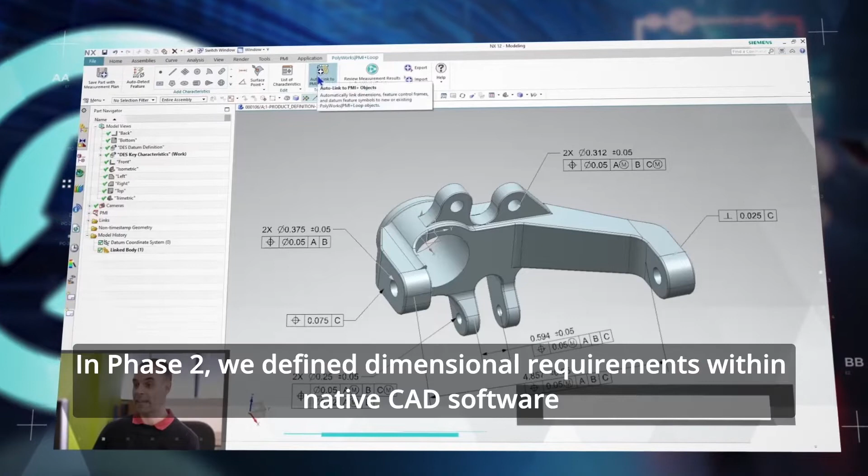We demonstrated digital 3D measurement processes that optimized the fabrication of a steering knuckle. In Phase 1, we measured the part and used PolyWorks DataLoop to give direct access to the resulting 3D measurement data to everybody in need of manufacturing feedback. In Phase 2, we defined dimensional requirements within native CAD software by using the PolyWorks|PMI+Loop model-based definition solution and shared this MBD with downstream applications.

We also showed how to import the latest CAD model revision stored in a product lifecycle management system directly into PolyWorks. Finally, we put all the components of the PolyWorks ecosystem to use and demonstrated an optimized digital process for managing part design changes.

Last year, we demonstrated that the digital 3D measurement processes were within reach for all our customers. This year, we'll roll up our sleeves and show you how it is done. We want to show you how a digital transformation project based on PolyWorks goes on in the field, practically one step at a time. We'll talk about the installation, configuration, and the customization of our digital enterprise infrastructure to allow customers to maximize their benefits.

We will show the benefits of the PolyWorks digital ecosystem existing through modules that can be deployed gradually, at whatever pace you feel more comfortable with. This approach is important as by splitting a large project into smaller ones, enterprises have more control over their implementation calendar and can avoid disrupting their own operations.

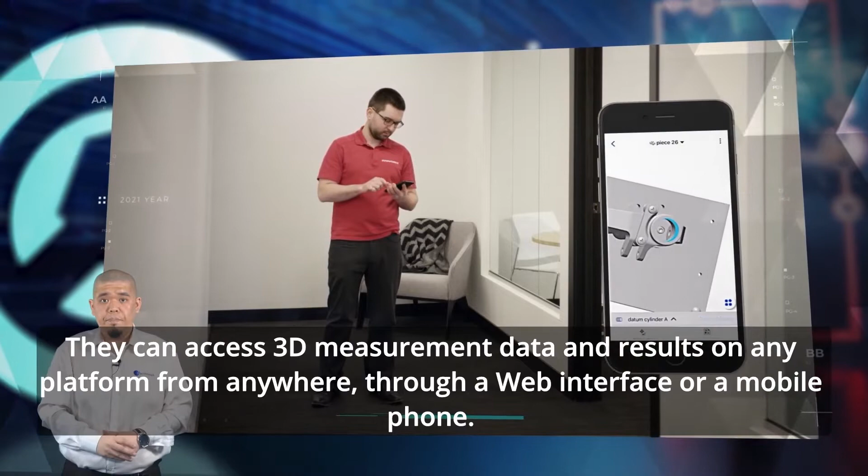For colleagues that need to consume 3D measurement data and have no PolyWorks expertise, it's like jumping into a whole new universe. They can access 3D measurement data and results from any platform, from anywhere, through a web interface or a mobile phone. They can exchange inspection projects by sending hyperlinks by email or chat, and it's even possible to launch technical discussions and tag colleagues within projects, for example, to investigate an actual manufacturing issue.

In our next step, we're going to define and implement a metadata management strategy. To understand the concept of metadata, just think about digital music. A digital audio file that plays a song does not come alone. It also contains the song title, the name of the author, the song's duration, a reference to the album, for example, and so on. This extra information that accompanies data is called metadata, and without metadata, it would be a nightmare to consume digital music, right?

In a 3D metrology context, metadata consists of important attributes describing the part design, piece fabrication, and 3D measurement processes. Ensuring meaningful and usable metadata is critical to maximizing the benefits produced by a data management system. For further details on metadata management strategies, here's Jean-Sébastien Blais.

Metadata designates the set of attributes or information that can be attached to 3D measurement data and follows it. In metrology, it makes sense to have metadata that describes the design, the manufacturing, and the measurement story for each inspected piece. Such important information can be entered as project and piece properties in PolyWorks Inspector. Project properties derived from the design context include the part name, its number, the material it's made of, and are generally entered just once.

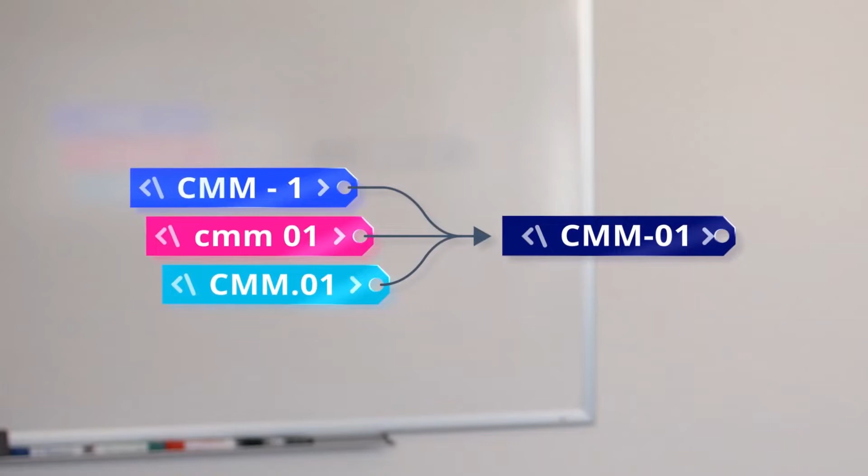With your metadata identified, the committee should also establish the list of possible values for each metadata. This will ensure everyone uses the same expression to fill in the properties. Together, the list and the possible values are what we call the metadata management strategy. Fortunately, PolyWorks includes all the tools you need to efficiently enforce the exact metadata management strategy your committee agrees upon.

First, to ensure uniformity, you can preset possible values both for standard properties and the custom properties you will create. Users will appreciate the convenience of selecting values from a list rather than typing required information. Second, you can decide which properties will be visible upon creating a new piece and make them required values. This helps the PolyWorks user focus solely on relevant properties and ensure the metadata is collected.

After giving this a try, you will rapidly realize the same properties are often being reused across your different inspection projects. Therefore, you will be pleased to discover that you can upload and link the properties you always use to DataLoop. This makes it extremely easy and efficient to reuse them. Clearly, PolyWorks contains all the required tools to help you enforce a robust metadata management strategy.

But remember, this all starts by identifying the key information to tie into your 3D metrology data. This is why we recommend implementing your strategy as early as possible within the PolyWorks DataLoop adoption process. You will soon discover that metadata plays a critical role in the resolution of manufacturing issues.

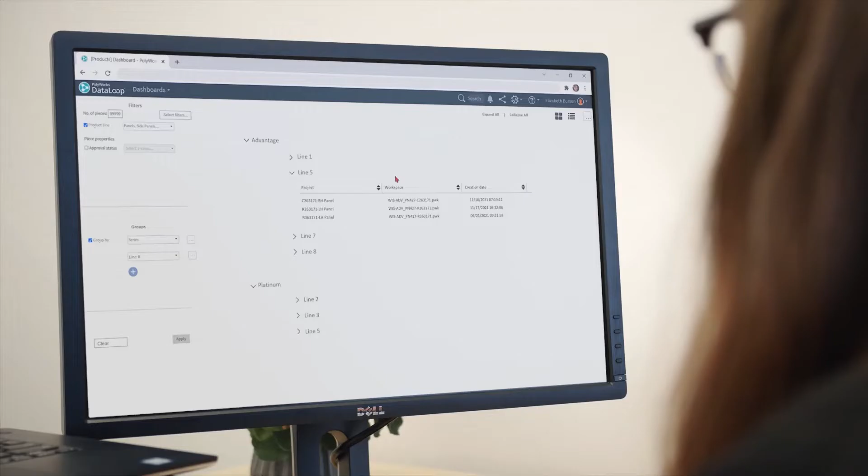Build individualized dashboards with widgets that monitor the inspections performed there. Here, it's helpful to configure SPC monitoring rules and alerts that will notify the operator when measurements begin to drift. Likewise, create a dashboard to cycle through incoming inspection results on a big screen TV, providing a real-time reference for all team members on the manufacturing floor.

Measurement trends that violate the SPC rules will display clearly in red, making it easy for operators to spot the issues that require immediate investigation. Finally, define notifications and alerts to automatically track critical inspection criteria in the DataLoop database. This greatly reduces all the repetitive manual monitoring you and your colleagues have been doing.

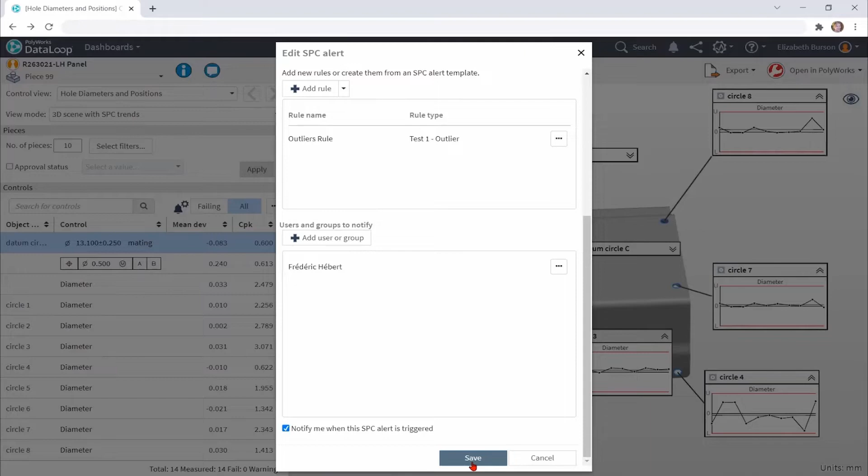For example, monitor the SPC performance of inspected critical hole positions, specify a list of recipients from the DataLoop users, and when the positions start trending out of tolerance, they'll be automatically notified. Or observe the percentage of controls within specification tolerance, or supplier inspection upload frequency, and deliver a notification when alert criteria are met.

The PolyWorks deployment is now complete. Dashboards and alerts detect and highlight manufacturing problems and immediately notify those who should be informed. And here's where our built-in digital communication tools ensure that this measurement information is immediately actionable. DataLoop empowers the interconnection of users, manufacturing data, and problem solving by integrating modern communication tools within the interface.

If you've been notified about a manufacturing problem via email, no problem. You'll also receive a hyperlink that directs you to the rich 3D measurement data context, so you can review the actual measurement data and make faster decisions. What if the problem is more complex and requires a task force to resolve it? Simply comment in the discussion thread directly within the inspection project, keeping the discussion linked to the data it addresses. Collaborate with colleagues by tagging them, and they receive a hyperlink to access the project data in real time.

With streamlined access to 3D measurement data of manufactured pieces, automated monitoring, and by deeply integrating digital communication tools that accelerate the resolution of manufacturing problems, PolyWorks has created a new category of quality control solutions. PolyWorks brings 3D measurement data to the heart of your manufacturing processes.

Currently, there are several products in the market that can manage dimensional controls of production pieces and trigger alerts on detecting a dimensional failure. What sets PolyWorks apart is that it also manages the inspection project data and offers modern communication tools. So when a failing piece is detected, users are a single click away from reviewing a piece's dimensional data in PolyWorks, and a single click away from inviting colleagues from other departments to join in the investigation efforts.

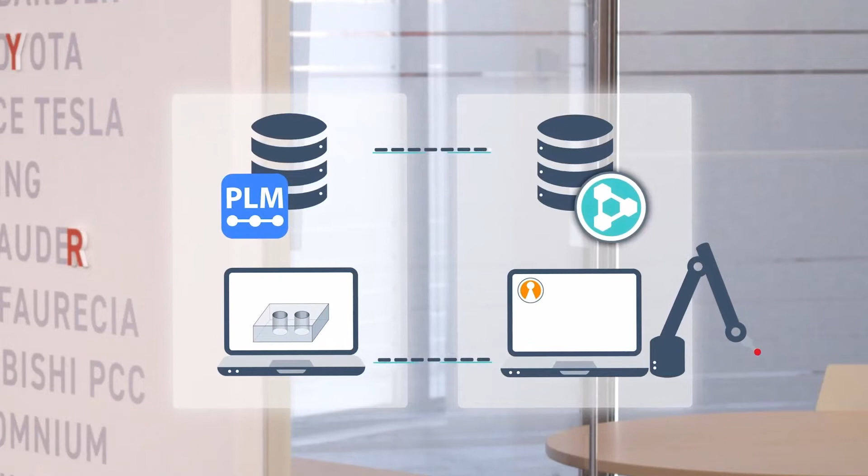With your product lifecycle management system, also known as PLM systems. PLM systems are solutions that manage the entire lifecycle of a product by integrating data, processes, systems, and people, and providing a product information infrastructure. With a PolyWorks DataLoop PLM connector installed, you can ensure digital data exchanges between your PLM system and PolyWorks.

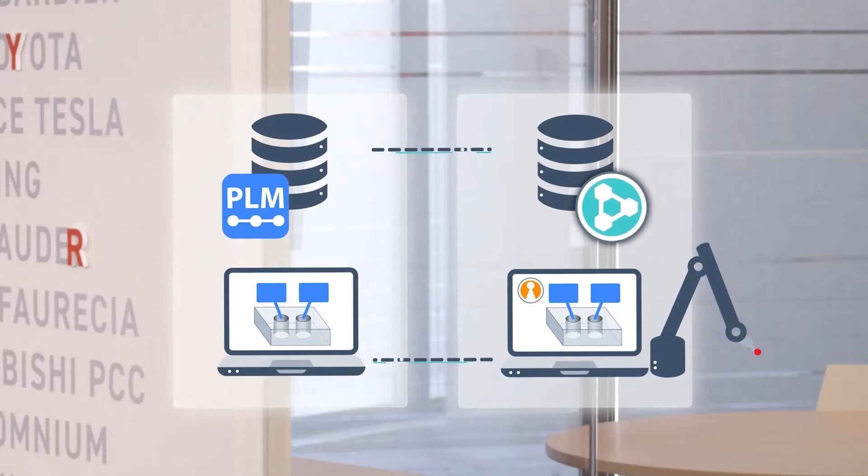PolyWorks users will search for CAD models within the PLM system and import them directly, and PLM users will directly access 3D measurement data and results in a single click, as our PLM connectors inject hyperlinks into the PLM items of the single parts and assemblies. A pretty good beginning, isn't it?

With the deployment of PLM connectors, you can say goodbye to manually exporting and sharing data on network drives and browsing for files. You ensure that CAD data and 3D measurement data move effortlessly between all the teams.

What's coming next? We recommend augmenting your corporate CAD software with the metrology-driven model-based definition solution, or MBD, to allow the creation of complete parametric 3D control plans within the CAD environment and increase the level of process automation.

By enriching your CAD platform with MBD capabilities, you'll ensure digital traceability by associating measurable and traceable 3D measurement objects to CAD geometry and assigning unique IDs to each dimensional requirement. Digital traceability enables 3D metrology software to digest the MBD and its revision automatically.

You'll also validate the measurability of dimensional requirements before embedding them in the 3D control plan, allowing 3D measurement operators to start measuring directly after importing the MBD.

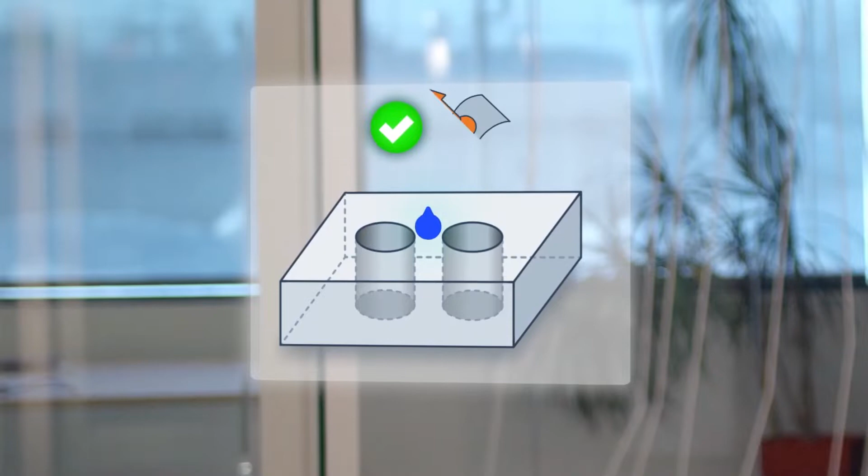Finally, you'll create all dimensional requirements within your CAD platform, including the ones that were traditionally created within 3D metrology software. At last, users of CAD and 3D metrology software can share the same 3D control plan. Sounds exciting, but how do we get there?

Firstly, users of your corporate CAD software need to learn the native PMI tools offered by the CAD platform using training material from your CAD software provider. With this new skill set, your CAD team will be able to define dimensions and GD&T attached to the CAD geometry and create multiple views to regroup this PMI in a logical manner suitable for reviewing and reporting purposes.

Then, it's time to deploy the PolyWorks|PMI+Loop MBD solution. PMI Plus Loop installs an add-in that injects a toolbar in your CAD software to provide access to MBD functionalities for 3D metrology that complements the native CAD PMI tools.

To ensure a smooth adoption of PMI Plus Loop, we recommend the deployment in 2 steps. Your CAD user should first leverage the native CAD capabilities by creating native PMI using standard CAD tools, adding this PMI to the 3D control plan and creating measurable and traceable objects automatically, and assigning unique numbers to dimensional requirements for reporting and troubleshooting purposes.

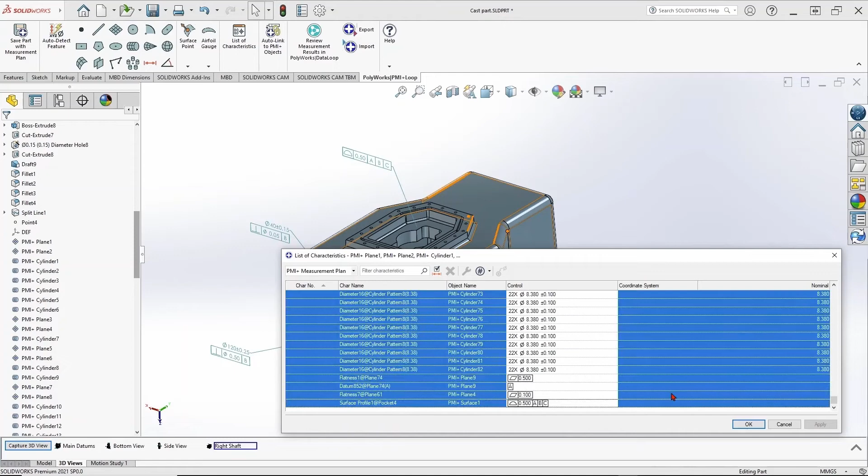Then, they can start creating more complete control plans. For example, by creating new object types, such as surface points, activating new dimensional controls that complement native PMI, such as airfoil dimensions, and using CAD coordinate systems to control the context of certain characteristics.

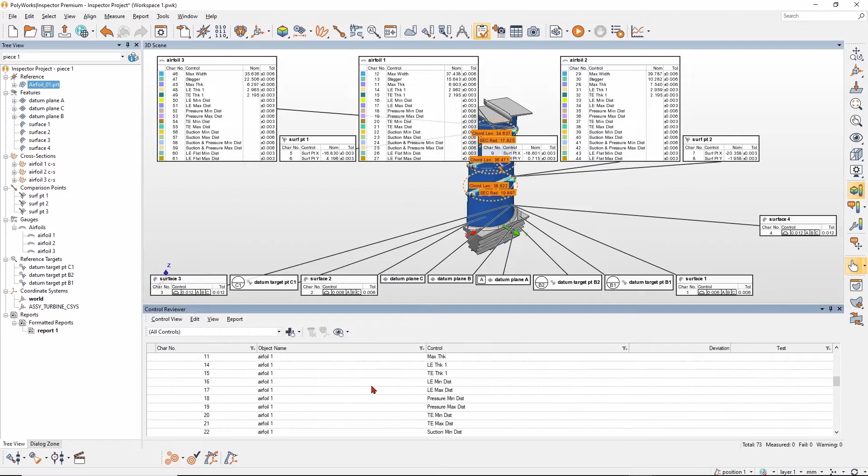We've talked a lot about a CAD team, but what about the 3D measurement team? Well, as PolyWorks Inspector automatically creates its 3D control plan upon importing the MBD data created by the CAD team, they have nothing to learn and can get to work sooner.

We've just seen how the PolyWorks digital technologies bring together the design, manufacturing, and 3D measurement teams. In this new world, 3D measurement data is consumed instantaneously by anyone who needs it. Modern digital technologies eliminate silos and facilitate collaboration between all the teams. And dimensional requirements are created only once within the CAD authoring tool and reused for all activities in the product lifecycle.

As you can see, the benefits of unifying the 3D measurement and product definition ecosystems are overwhelming, and I have two further points to add here. Firstly, the universal access to 3D measurement data is the key to fueling the creativity of the engineering and manufacturing teams. 3D measurement data is already used to optimize manufacturing processes, perform virtual assemblies, simulate a piece's behavior under various conditions, and improve the manufacturability of future designs. It's up to each organization to exploit this goldmine of information to its fullest.

Secondly, the injection of hyperlinks within the PLM systems holds the secret promise of digital traceability. It becomes possible to digitize PLM-based enterprise processes such as design changes and part approvals, while referring to the complete 3D dimensional data that could be reanalyzed at a later point. PolyWorks integrates the digital twins of measured pieces within the PLM.

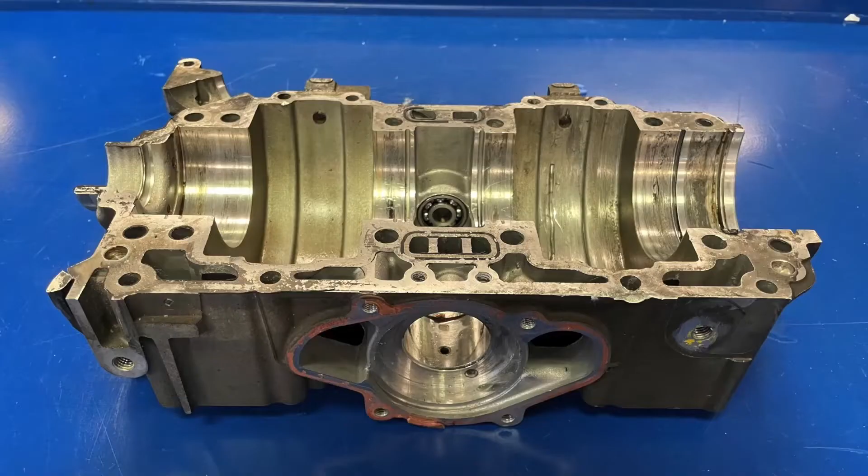The heart of the solution is a mechanism that carries the geometry of the manually fitted or probed features to the next piece. If we know where a feature is relative to alignment geometry on the first piece, we can look for that feature in the same relative location on future pieces. This function is performed by a new tool called a measurement guide. It is a sort of invisible feature primitive that sits behind manually measured features and retains the geometry of the initial measurement, whether probed or extracted, and brings that information to subsequent piece inspections.

Let's look at this new workflow as it follows the familiar hybrid inspection on this motorcycle part. We have a set of them that have each worn a little differently, and engineering would like to compare them.

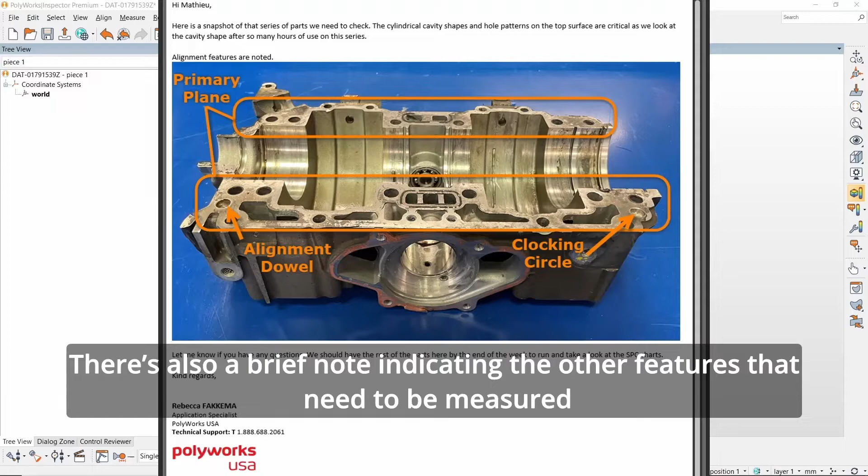This memo lets us know what geometry we should use for the alignment. In this case, we want to use this plane and the two dowel pin holes for a plane center point axis alignment. There's also a brief note indicating the other features that need to be measured, both in the part cavity and the bolt patterns. Normally, we would start by measuring our alignment features, so let's do that here.

Just like if we had a CAD model, we can use an alignment to bring our data to a coordinate system. This is essentially what we do with an alignment to CAD. If we were aligning to CAD, we would move the data using surfaces and features to corresponding nominal surfaces and features. In this case, we're bringing the features we would measure directly to the coordinate system. No CAD, no problem.

The destination on the tertiary features asks us for a point. We don't know what the coordinates are where the circle is supposed to be, but we can choose which direction we want to clock it to by entering a positive number next to the axis it will lock to. Now the part is aligned and clocked correctly to the x-axis. We'll continue to measure the rest of it.

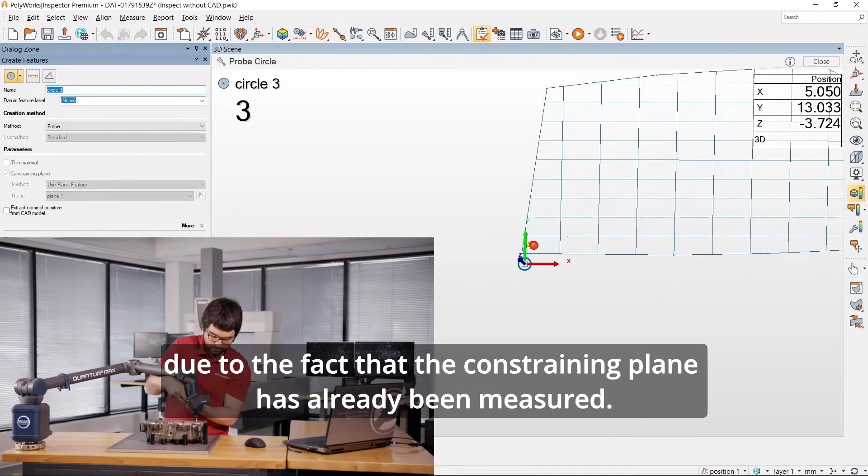The hole pattern will be measured with the hard probe easily, due to the fact that the constraining plane has already been measured. The fastest way to thoroughly capture all the features in the cavity would be to scan it. This is one advantage of having a hybrid hardware solution. Surface-based features, like the planes and the cylinders in the part cavity, can be quickly fit using the Extract from Polygonal Model tool.

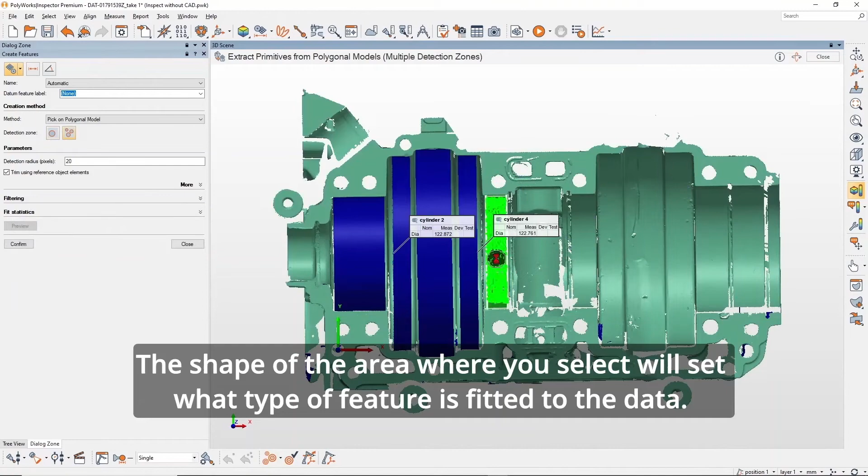You might notice that this tool moved in PolyWorks 2022. It is now with your other Extract Multiple Type tools in the Create Features menu. As usual, PolyWorks will initialize the curvature of the scan the first time you start picking features, after which picking will be near instantaneous. The shape of the selected area will dictate what type of feature is fitted to the data. Flat areas create planes, while curved areas create cylinders, cones, and spheres, all with Pick on Polygonal Model as the creation method in the feature properties.

We can add nominal information to features and tolerance them in geometry controls. For groups of features, like the hole pattern that was probed earlier, or the cylinders which have different diameters but the same tolerance, select the relevant features and set all their nominals or tolerances in the geometry controls at the same time.

In addition to features, other controls like cross sections and calipers can be added to the project to control the local width of the cavities. All sorts of calipers can be used on scan geometry, with or without CAD. As usual, the final step is to build the report, which has been completed. With the part inspected, we're ready to measure a new piece.

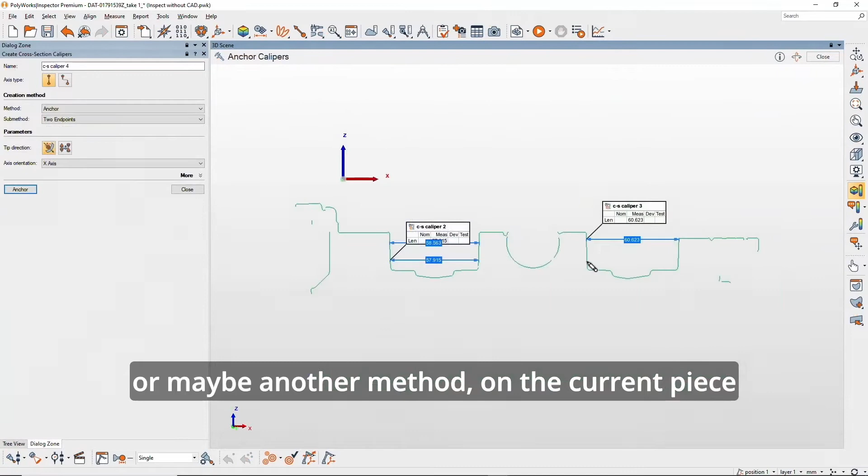Before we start inspecting it, remember that we manually created features, either by probing, extracting from polygonal model, or maybe another method on the current piece. Usually, if we were doing a multi-piece inspection with CAD, we would extract any features fit from the mesh. We want PolyWorks to do that the next time, so let's extract them now. Right-clicking and extracting measured changes the measurement method in the feature properties.

When we change the measurement method to extract, our measurement guide takes over and becomes the extraction source for the feature. It is normally invisible, but we can expose it by right-clicking on the feature and selecting View, Measurement Guides, Restore. Let's see how these measurement guides provide probing and feature scanning guidance and automate extraction in the next piece as we measure it.

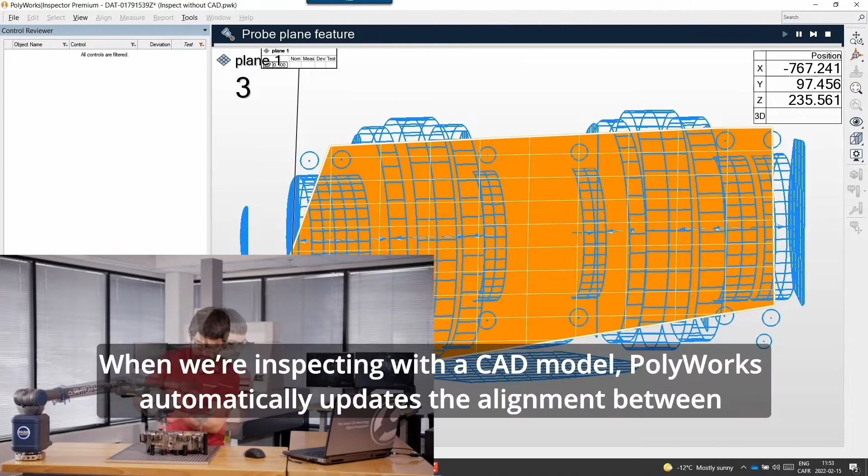Now that we've launched our new piece, the measurement guides are visible for all features, giving the operator an overview of the part's shape so that they can start measuring the correct features confidently, even without CAD surfaces. When we're measuring with the CAD model, PolyWorks automatically updates the alignment between the device and the part as soon as the alignment features are measured. The same happens here, and guidance walks our operator Mathieu through probing the rest of the circles.

After probing, PolyWorks prompts the user to begin scanning. Feature scanning guidance highlights features that have not yet been scanned in orange, and ensures that the operator captures enough data in the measurement guide locations for reliable feature extraction.

When scanning is completed, the features extract based on their measurement guides, like we saw earlier in the feature properties, and the project will update as normal in PolyWorks. Let's double check our updated report. The operator can continue inspecting as many pieces as needed using the same process.

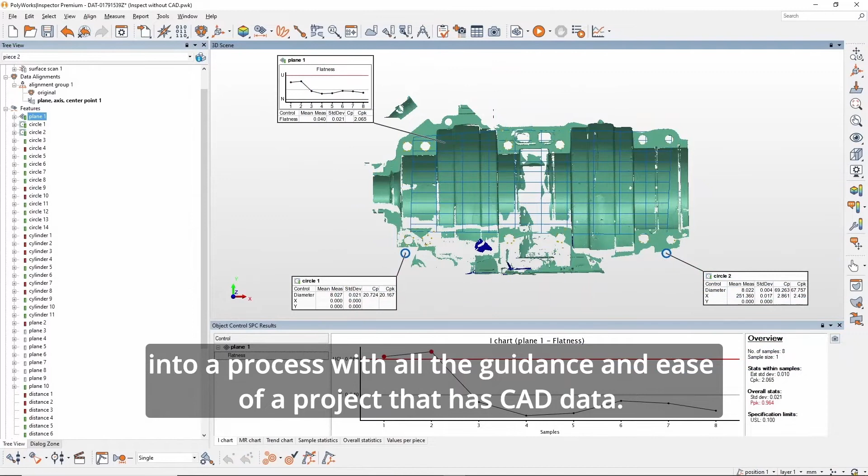As you can see, the measurement guides turn our CAD-less multi-piece inspection into a process with all the guidance and ease of a project that does have CAD. So here we saw how easy it is to create an inspection template without a CAD model on PolyWorks Inspector. By using this piece template, we have the benefit of having guidance when scanning and probing on subsequent pieces. The measurement guide also allows us to use our powerful extraction methods to obtain results in an automated and repeatable fashion.

With this template, we have the benefit of having guidance when measuring subsequent pieces, both for scanning and probing. And the powerful extraction methods on PolyWorks allow us to obtain results in an automated and repeatable fashion. This workflow proved incredibly useful in an array of situations, such as the CAD model not being available, the CAD model arriving late, or the CAD just simply does not match the part or the drawing, such as missing features or geometric discrepancies.

These situations can also cause a series of issues, such as misleading information after the inspection is completed, time wasted looking for the correct version, and the impossibility of trying to measure features that simply aren't on the CAD model and don't match up.

This is why in the next video we will see how to tackle those situations by incorporating the correct CAD model when it eventually shows up, so that you can use your extraction CAD-based tools such as color maps, surface features, and many, many more. You'll also see how you can use the new measurement guides to complement the CAD-based inspections when needed by measuring features that might be missing.

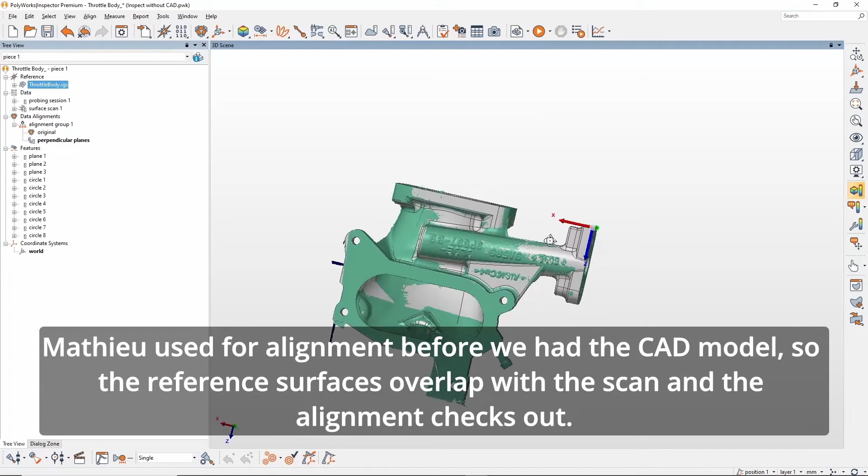The CAD model can be dragged and dropped directly into the project. Its coordinate system matches the coordinate system on the drawing that was used for the alignment before we had the CAD model, so the reference surfaces overlap the scan and the alignment checks out.

When the CAD model imports in the correct location, nominal feature components can be extracted directly from the CAD object. Right-click on the feature and extract its nominal automatically using the second item in the right-click menu. PolyWorks will find the CAD geometry that matches the measured features and define it as the nominal component for the feature. Of course, extracting the nominal primitives from the CAD fills in the missing nominal information in the geometry controls, as is the case for these circles.

Tools like surface profiles and reference object color maps are only available when you have nominal surfaces. We can add a surface color map to this project and adjust its limits by hovering the cursor over the scale bar and scrolling the mouse wheel until the full range of the scale matches the area we're interested in.

Last step is to create a template and use it to update all the other pieces in the project. Since we added the CAD and color map in the first piece of the project, let's create a piece template from this piece and link it to all the other pieces in the project.

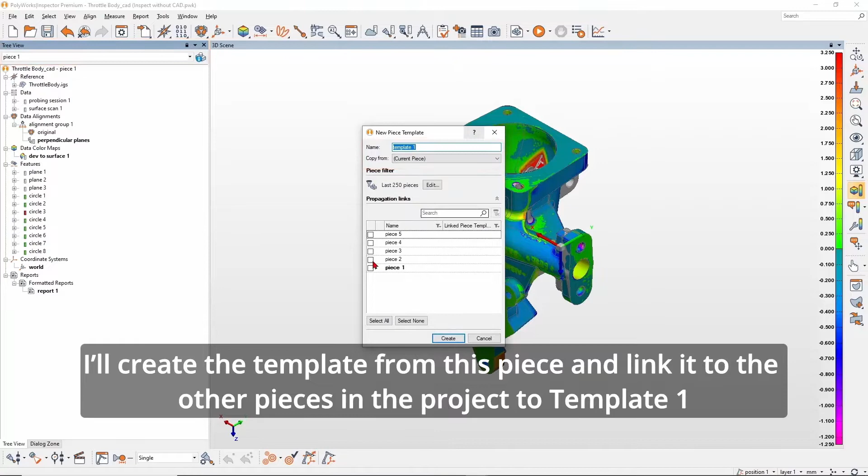Propagation ensures that our previously inspected pieces use the CAD model along with the new nominal information, as well as features and controls, or even color maps and reports we have added. The SPC charts now show nominal position information for the controls of these circles.

There is another scenario in which pairing the new measurement guide tool with propagation can be very useful. In the event that there is a feature on the part that is not on the CAD, how can we include it in our multi-piece inspections? This throttle body has an insert where there is a hole on the CAD model. Let's use a measurement guide to include this feature in our multi-piece inspection.

The cylinder is fit to the scan using the Pick on Polygonal Model tool. This takes us back to when we didn't have CAD. I'll extract the feature to tell PolyWorks how I want the feature to be measured on the future pieces, and the measurement guides become the extraction source for the cylinder.

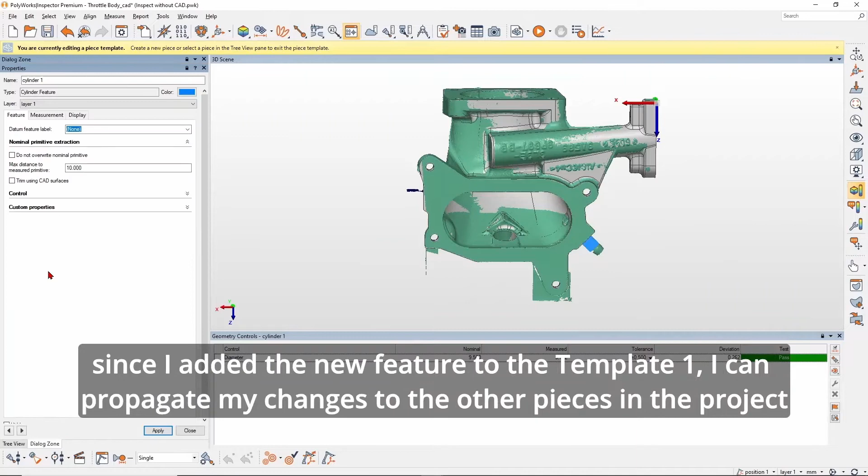Of course, since I added the new feature to the template, I can propagate my changes to the other pieces in the project. The measurement guides will be propagated to the other pieces, so once again our SPC charts indicate that the feature has been painlessly added to every piece in the project. Our hybrid project has the agility to adapt when CAD data becomes available, and the flexibility to fully integrate all of the measurements you need.

So, in summary, if a user started inspecting without a CAD model, all the work that they did can be reused and even enhanced if the CAD model eventually becomes available. We can now add the reference model in post-inspection for some more advanced measurement tools and use the measurement guide technology to measure features that were missing on the CAD model.

Finally, we can use the power of propagation to apply these changes to all previously measured parts for the coherent set of results for SPC with minimal effort.

So thank you everyone for watching the first workshop of the day. I'm pleased to have shown you that inspection without CAD now follows the PolyWorks universal workflow in subsequent pieces. And now, setting up multi-piece inspections are more powerful and easier than ever, thanks to this new measurement guide technology.

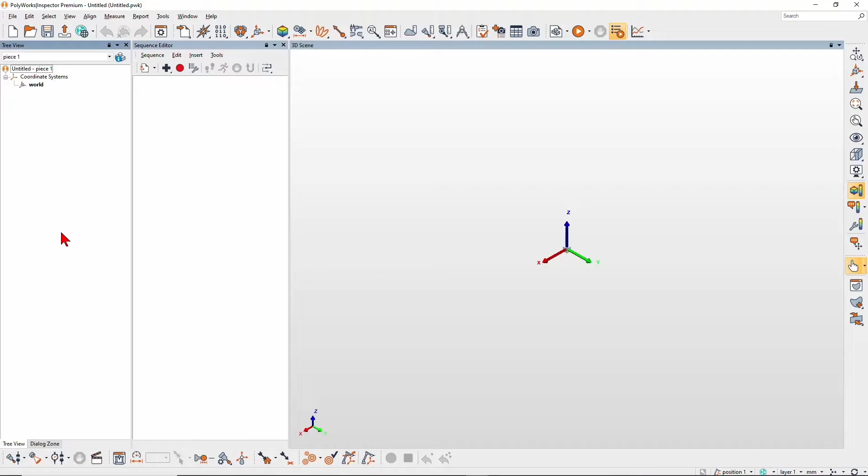In this example, we have a CMM programmer and a CMM operator collaborating on the inspection of a machined pump housing. This template was created and uploaded by the programmer and is being downloaded by the operator. Thanks to DataLoop, it is easy to transfer a project from the programmer's office to the metrology lab. This project contains a 5-axis sequence to be used with our Renishaw PH20 head.

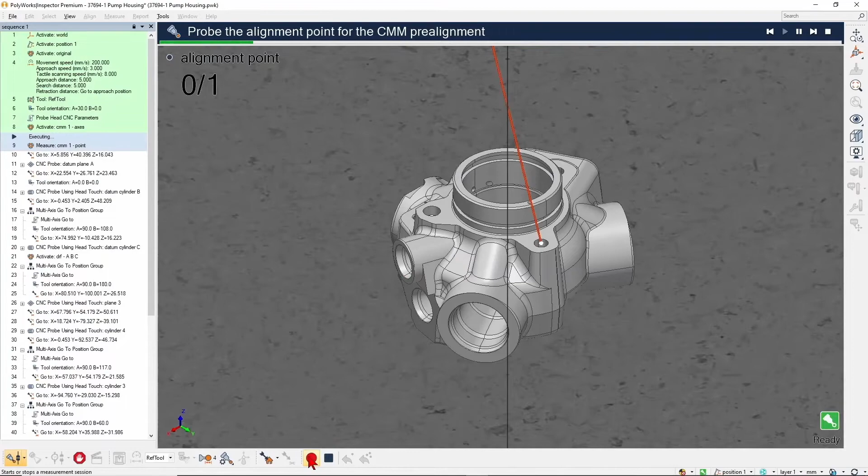The operator is about to measure a new piece, and we are going to take a closer look at the measurement process in action. I will be highlighting the new functionalities that will be explained in more detail as this workshop progresses. This sequence step defines the speed and acceleration values for the A and B axes of the PH20. As we see now, the first steps in any CNC CMM sequence are to probe the alignment features, in this case, our datums.

Here we see the first use of a 5-axis movement within PolyWorks Inspector. This cylinder is being measured efficiently using 5-axis movements to minimize the time between measured points. Here we can see a tool change and a go-to position occurring simultaneously within a multi-axis go-to position group. This is yet another new 5-axis functionality offered within PolyWorks Inspector this year.

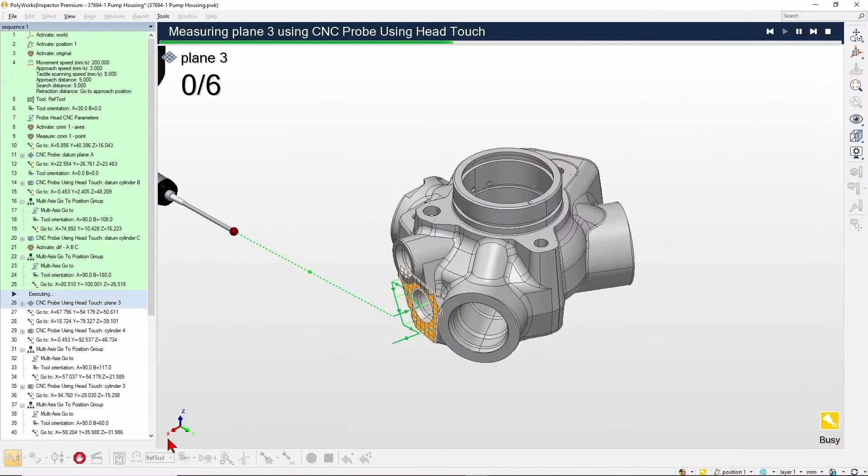Here we can see the optimal measurement of a plane, utilizing all 5 axes of the PH20 in the process. This part of the sequence is interesting. We see how well the sequence is utilizing the combination of 5-axis go-to positions and head touches to measure all those cylinders around the part. As you can see, as soon as the head is done measuring the cylinder, the 5-axis go-to position kicks in, allowing the head to be quickly ready to measure the next feature.

Comparison points can now be measured using head touches while running a standard PolyWorks measurement sequence, just like other supported CMMs.

The measurement sequence is now complete, and so is the report. This is the typical day-to-day process of a CMM operator. The measurement sequence can be easily repeated automatically to measure multiple pieces.

There we have it. We've just seen the day-to-day life of a CMM operator using PolyWorks. The operator quickly retrieves an inspection project prepared by someone else using DataLoop, and then runs the collision-free inspection on a CMM, measuring multiple pieces using the PH20 probe head. This is a very efficient workflow.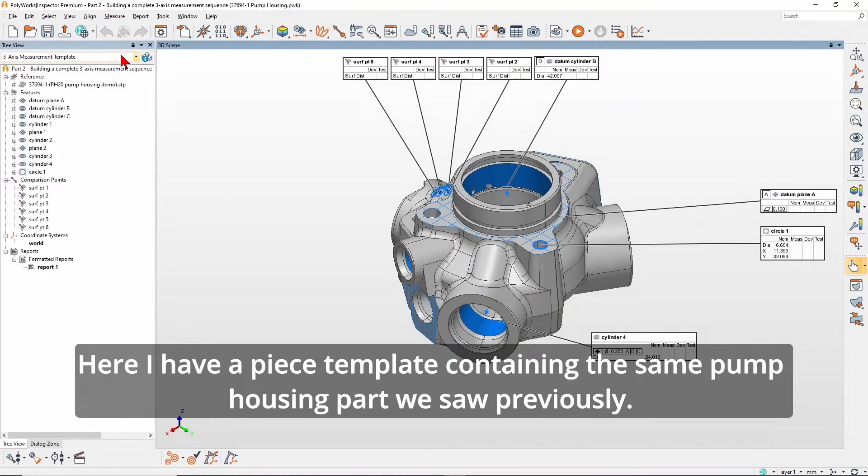Here I have a piece template containing the same pump housing part we saw previously. All the required measurement objects are already created. I just need to create an optimal three-axis measurement sequence. I will be running the UCC server in offline mode. This is a requirement for offline simulation with the PH20. Also, I will be using the I++ plugin to connect to the CMM with PolyWorks.

I will begin by connecting to my device. Now, I will open the sequence editor and start recording to automatically add the initial required steps into my sequence. Next, I will utilize a CMM pre-alignment to quickly pre-align the part to the device. The selection of my axis is already correct, so I will now simulate the measurement of the selected feature center point.

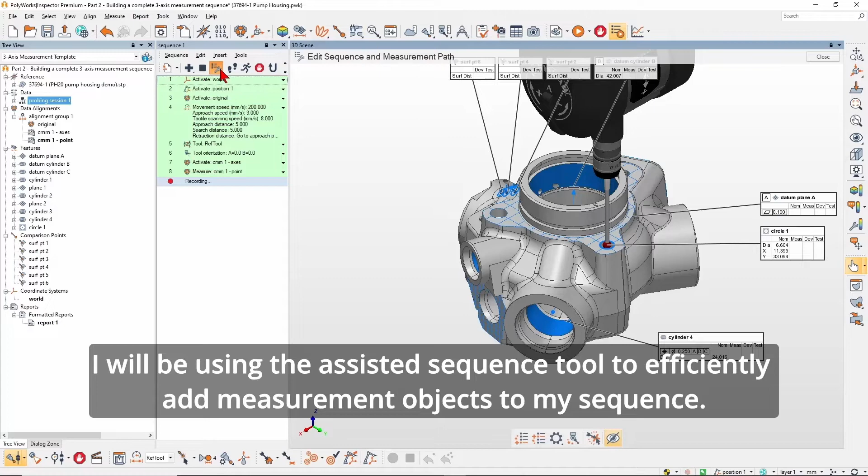Looking in the bottom right toolbar, I can see that collision detection is active. I can begin adding measurement objects to my sequence. I will be using the assisted sequence tool to efficiently add measurement objects to my sequence. I will select the alignment features in the tree view, then add them at the end of the sequence in an optimal order. This allows PolyWorks to order the selected features in a logical, efficient measurement path. Go-to points will also be generated to ensure collisions do not occur.

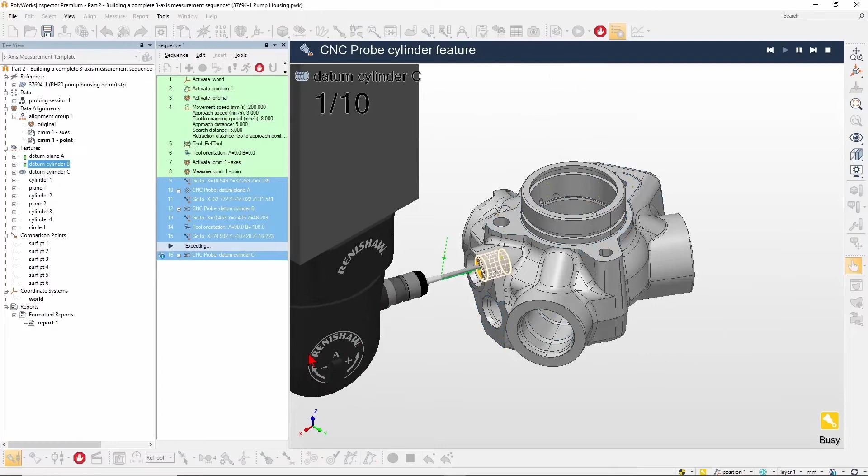With these features added, I will now execute my sequence. As explained at the start, I am connected to an offline simulation of the machine, so I do not need to be connected to the actual machine to prepare my project. All the measurements we see taking place now are being simulated. Now that my alignment features are measured, I can create a datum reference frame alignment to datums A, B, and C.

With the final alignment in place, I can continue using the assisted sequencing tool to add the rest of the measurement objects to the sequence. The recommended workflow that I will be using allows the assisted sequencing tool to quickly build a complete sequence while letting me stay in control. First, I will select a group of features that will be measured using a specific tool orientation. Next, I will select an optimal tool orientation to measure these two features. It is important that we record this step so that the tool orientation change is saved in the sequence.

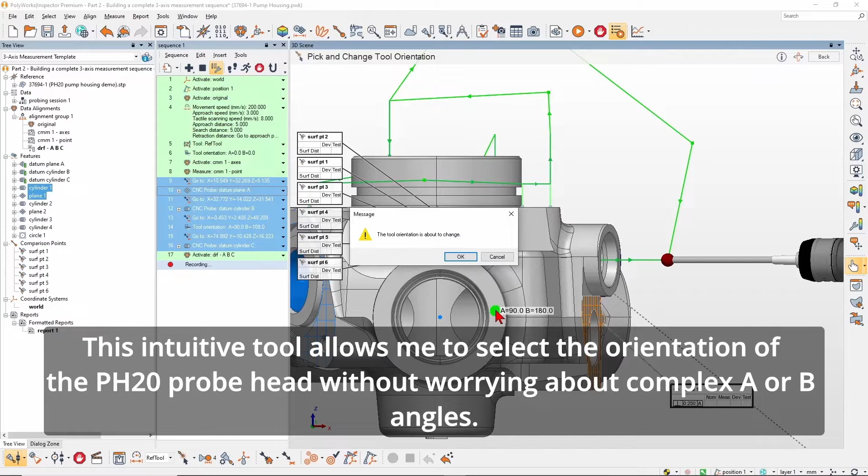With the Pick and Change tool orientation feature, I can pick the tool orientation directly from the CAD model. This intuitive tool allows me to select the orientation of the PH20 probe head without worrying about complex A or B angles. Next, I will use the assisted sequence toolbar to lock the orientation of the tool to the current one I just picked from the CAD model. Now I can add the selected features to the end of the sequence. Remember, this still allows for optimization of the generated steps. Now I will execute my sequence.

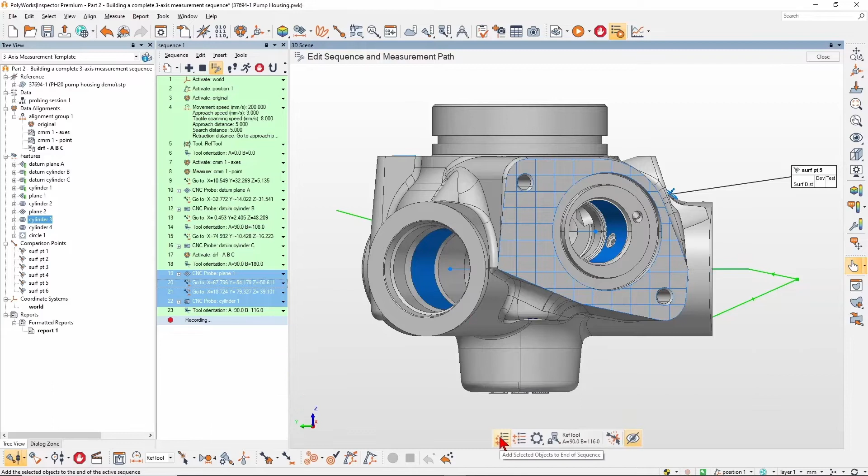I will show you this workflow again with the next feature. First, I will select the cylinder in the 3D scene. Then, I will activate the assisted sequencing toolbar. I will then begin recording my sequence. Now, I can pick the tool orientation from the CAD model. And finally, I will add the cylinder to the end of my sequence. Now, I will execute my sequence. I will fast forward a bit as I continue measuring features with this workflow.

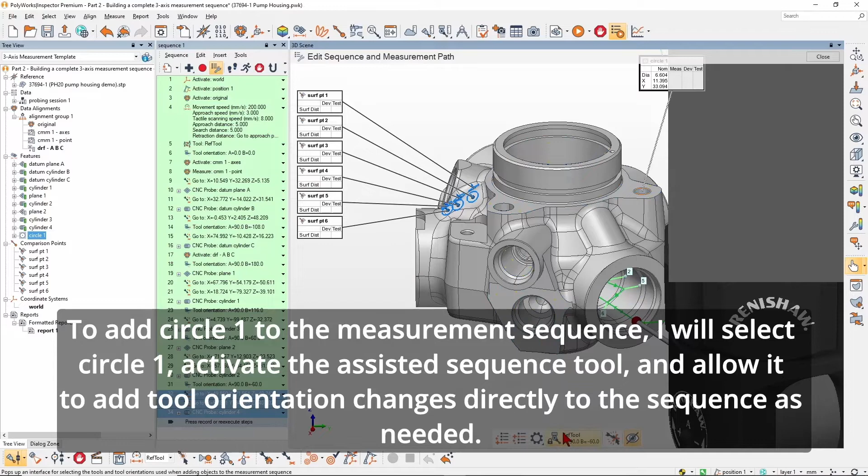To add circle 1 to the measurement sequence, I will select circle 1, activate the assisted sequence tool, and allow it to add tool orientation changes directly to the sequence as needed. Then, I will add it to the end of the sequence. I will now execute my sequence.

The assisted sequencing tool is not just limited to features. I will show you by adding a handful of surface comparison points optimally at the end of my measurement sequence. I will use the same workflow that we saw at the beginning for features. Only this time I will select the comparison points. Activate the assisted sequencing tool, begin recording, pick my tool orientation from CAD,

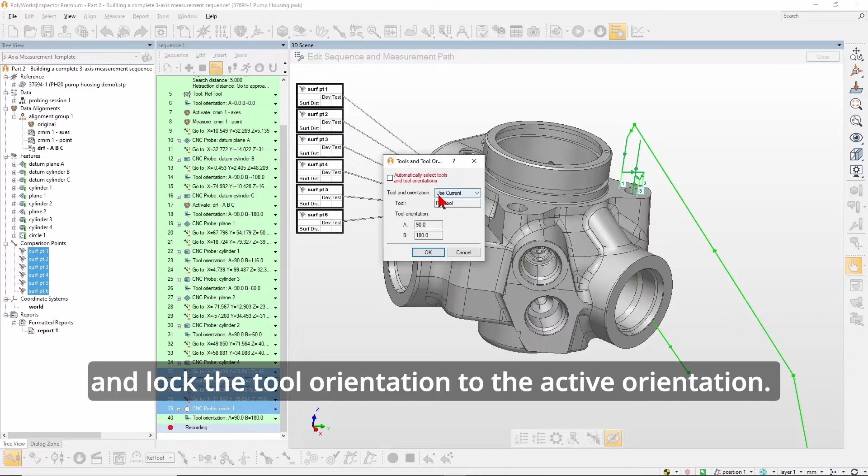and lock the tool orientation to the active orientation. Now I can add my selected comparison points to the end of my sequence and execute it. Now the comparison points have been added to the end of the sequence along with the supporting go-to positions.

Now I have a 3-axis collision-free measurement template. I will delete the measurements so I can have a clean template, and then I will upload it to the PolyWorks DataLoop server.

Now, more about PolyWorks Inspector's assisted sequencing. It is a smart functionality that adds objects in the optimal measurement order, while adding the go-to moves to avoid collisions with the part, the fixture, or other artifacts. It is at the heart of the CNC CMM sequence creation in PolyWorks since 2019.

Assisted sequencing makes it easy and fast to prepare a collision-free sequence with the optimal measurement path. It is an extremely efficient way of preparing a sequence. And as you may have noticed at this point, there is nothing specific to PH20 heads. The 3-axis sequence preparation process is the same, no matter which hardware you use, which is why we say our workflow is universal. At this point, you would be ready to measure if you were using a traditional index head.

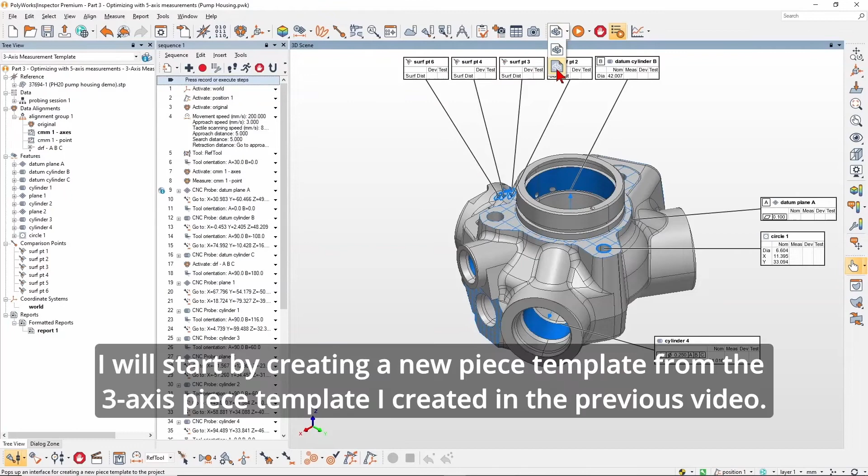I will start by creating a new piece template from the 3-axis piece template I created in the previous video. To start the optimization, I will activate the I++ multi-axis utilities toolbar. This is where I will find the tools to unlock the full 5-axis measurement potential of the PH20 in PolyWorks Inspector.

The first step is to insert probe head CNC parameters into the sequence. It is important to insert this early into the sequence as it defines the parameters to be used by the PH20 during head touch measurements. The first optimization tool allows me to insert multi-axis go-to position steps into the measurement sequence. This time-saving tool is used to optimize go-to positions and tool orientation changes into one fluid movement.

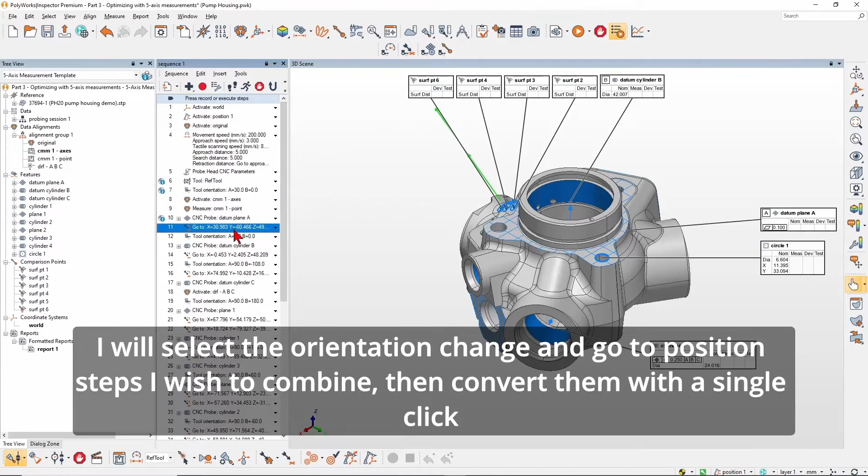I will select the orientation change and go-to position steps I wish to combine, then convert them with a single click. Note that when I select an optimization from the toolbar for the first time, I am prompted to disable collision detection. This is a requirement when using the multi-axis toolbar. Because I originally created this sequence with collision detection, I can be confident that there will not be any collisions. Now, the multi-axis go-to optimization is complete. Let me remind you of this fluid 5-axis movement with a flashback to the first video.

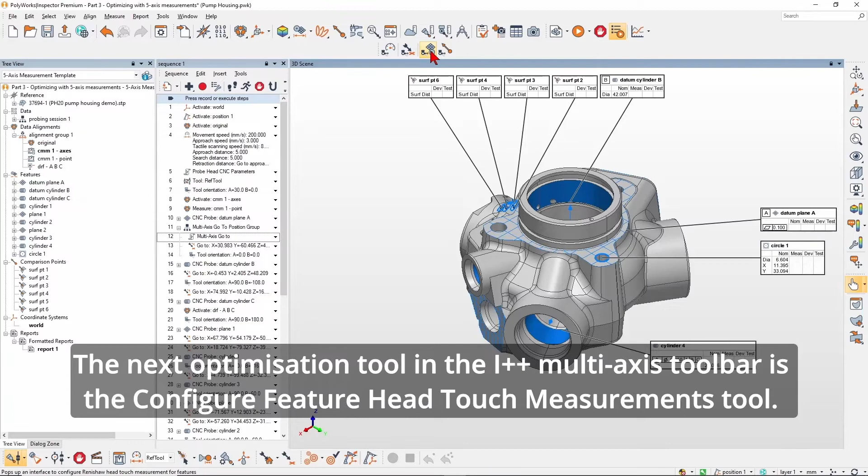The next optimization tool in the I++ multi-axis toolbar is the Configure Feature Head Touch Measurements tool. This tool will allow us to optimize our feature measurement sequence steps for 5-axis head touches with PH20. The optimization tool workflow is very simple and efficient. Select features of the same type that will be optimized. For now, I will just select Datum Cylinder B. Now, open the Configure Feature Head Touch Measurement tool.

We can see the selected features listed in the Features selection. We also have an option to select other features as well. For now, I will use the original selection of Datum Cylinder B. Below this, we have 3 approach types available. I will select Keep Probe Head Along Axis. This is a specific method for internal circles, cylinders, and cones that will optimize the measurement path along the axis of the feature and use head touches from the center of the hole to acquire points.

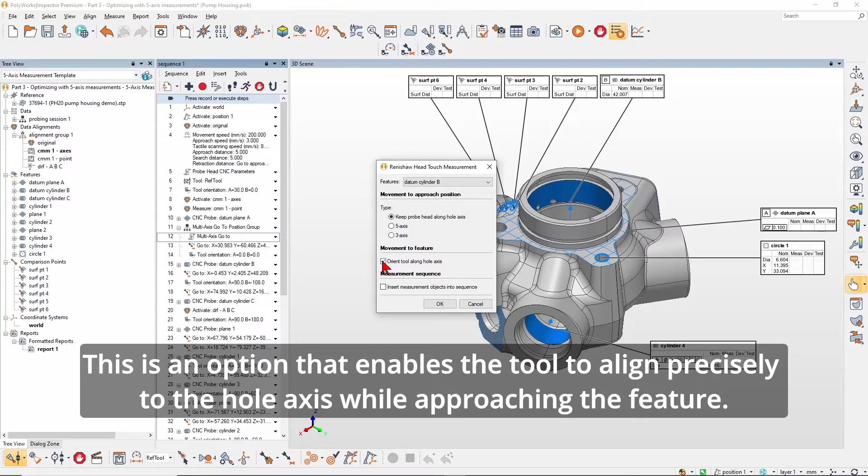I will also select Orient Tool Along Hole Axis. This is an option that enables the tool to align precisely to the hole axis while approaching the feature. I will show you what this optimized measurement looks like in action.

Now, I will optimize a plane for 5-axis measurements. Plane 1 has a cylindrical feature directly above it, so I will use the 3-axis method. This method allows for head touches to acquire measurement points while keeping a fixed tool angle during movements between them. The benefit here is maintaining the maximum clearance between the head and part while still using head touches to acquire measurement points.

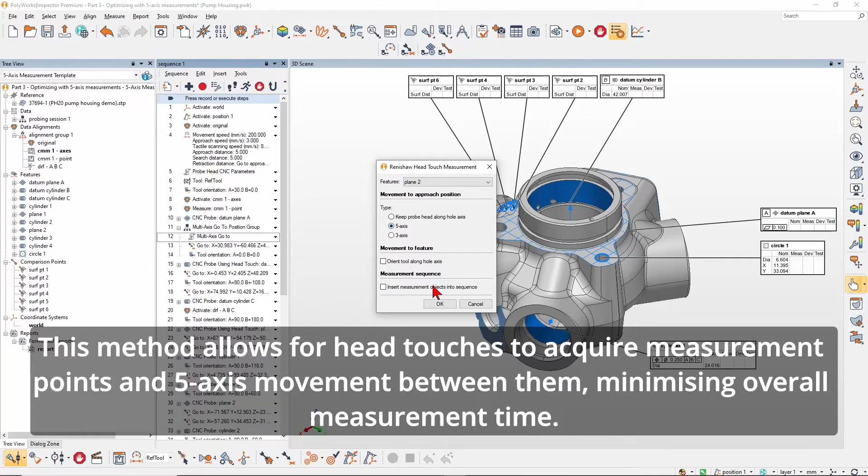The next plane I will optimize is plane 2. This plane is open and clear of potential collisions, so I will use the 5-axis method. This method allows for head touches to acquire measurement points and the 5-axis movement between them, minimizing overall measurement time.

This tool optimizes the measurement of comparison points. It allows configuring comparison points for head touch measurements. Just like we saw earlier with features, there is an option for 3-axis or 5-axis movement between each point. When measuring multiple consecutive comparison points, it is more efficient to group them into one sequence step. This is what this checkbox allows. This will decrease the overall measurement time of a group of comparison points.

In this video, we can see the measurement of a group of comparison points using a 5-axis movement between each point. I will continue and complete the optimization of my sequence using these tools. Here, I will add another multi-axis go-to position. You can see here that I am selecting multiple cylinders and optimizing the measurement of them all at once.

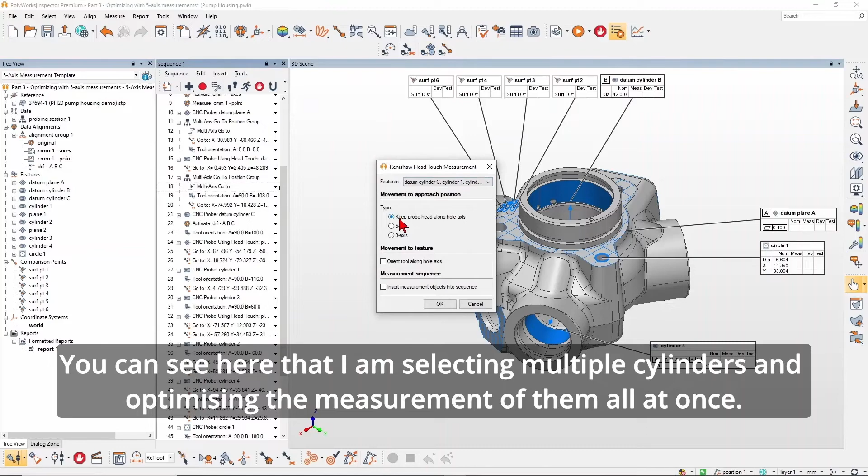In addition to my 3-axis measurement template, I also now have a complete 5-axis measurement template ready to maximize the efficiency of PolyWorks Inspector coupled with the PH20. I will upload my project to the PolyWorks DataLoop server, and it will be ready for immediate download and use by the CMM operator.

We've just seen how easy it is to optimize a CMM measurement sequence for a PH20 probe head. It is simple and straightforward. By using the new I++ multi-axis utilities toolbar, we can firstly create 5-axis movements by combining tool orientation and go-to steps, and quickly configure objects for head touch measurements. As you have seen throughout this workshop, we have gone through the whole measurement sequence creation process, demonstrating all the steps. A complete measurement sequence for a part of medium complexity can definitely be prepared in less than an hour with PolyWorks.

Our main goal today was to show that our CMM solution now fully supports the Renishaw PH20 probing heads for 5-axis part inspection. Now, thanks to PolyWorks, your PH20 measurement sequences are quick to prepare and easy to understand. You benefit from universal projects that can be used on any CMM if needed. And don't forget that you can easily share projects with your colleagues or suppliers thanks to DataLoop, our data management solution. Overall, these tools make your metrology process as simple and efficient as it can be.

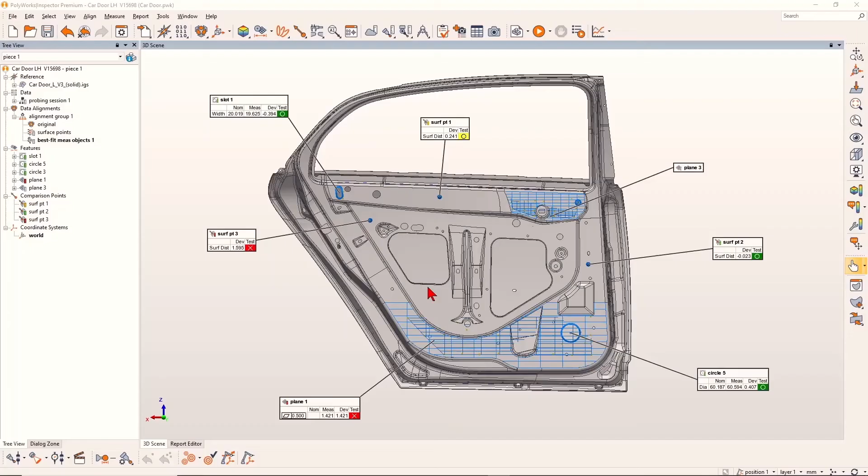To start this example, an inspector project has been prepared that has one piece measured. Now we will put on the Microsoft HoloLens 2 glasses and get ready to inspect the piece.

From the HoloLens menu, we will launch the PolyWorks AR application. We are then prompted to select which project we would like to connect to. At this point, the HoloLens is downloading information from my computer in order to guide me with holograms.

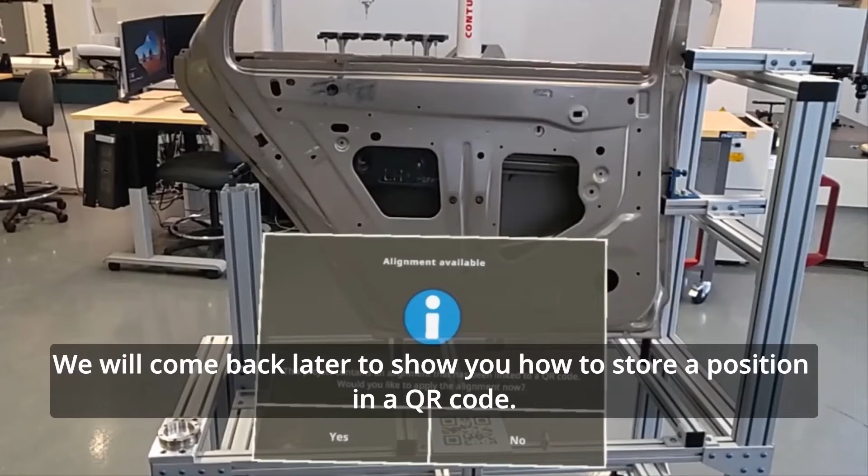PolyWorks AR lets us know that we can automatically overlay the hologram of the CAD model onto the physical piece using a position stored in a QR code. We will come back later to show you how to store a position in a QR code. For now, we will scan the QR code next to the fixture to define the position of the CAD's hologram.

Now, you may notice certain gaps in between the real world and the holograms, but that is just due to the recording process. The display is much better when looking through the glasses.

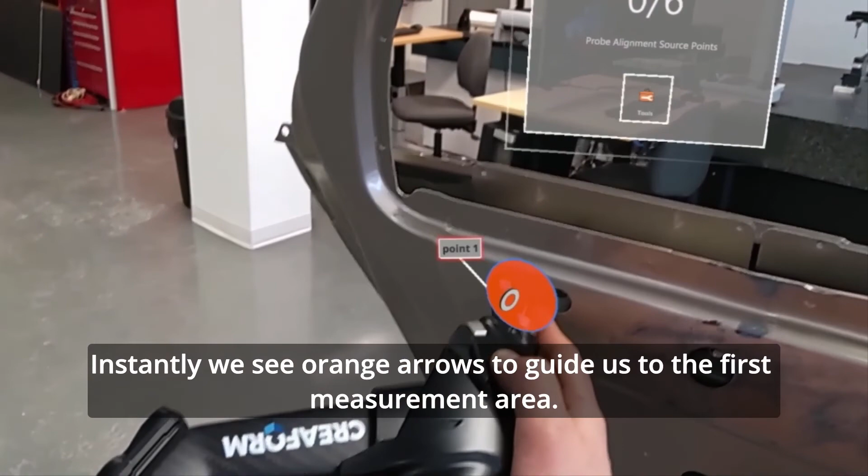We are now ready to play the inspection to run through the measurement sequence. The first step is a surface point alignment. Instantly, we see orange arrows to guide us to the first measurement area. With PolyWorks AR, it is incredibly easy to know where to probe the next point without ever having to look back at the computer. Let us now fast forward for the remaining 4 points.

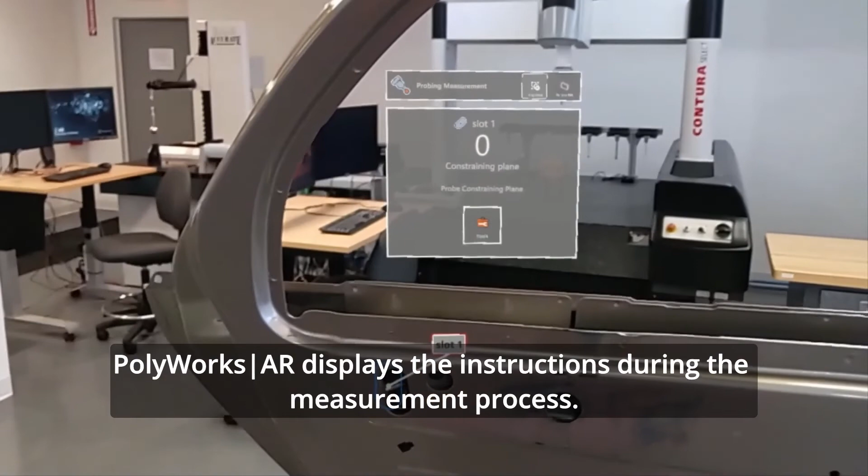With the surface point alignment now done, we are guided to the first feature that needs measuring. PolyWorks AR displays the instructions during the measurement process. The object name is displayed alongside the measurement steps, such as local constraining planes and any guiding instructions added when setting up a project.

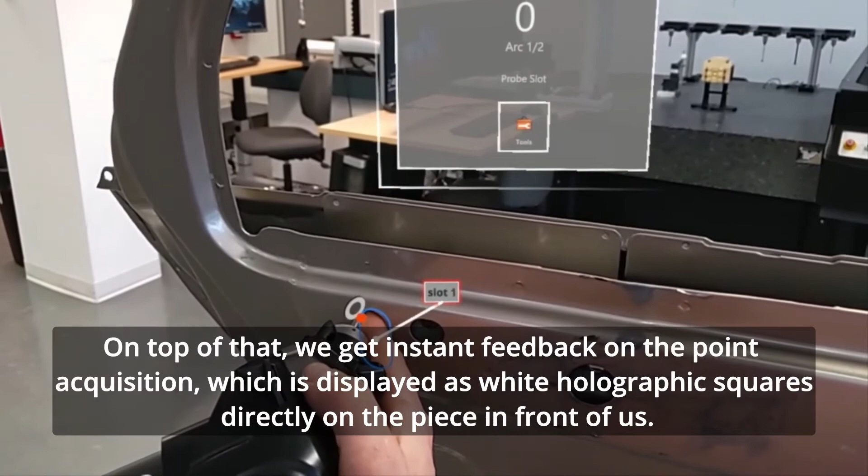On top of that, we get instant feedback on the point acquisition, which is displayed as white holographic squares directly on the piece in front of us. For the slot feature, we need to probe 2 arcs, and looking at the information in front of us, it is clear where we are in the probing process and what we should be doing next.

With this first feature probed, we are again guided to the next area to measure. This allows us to cycle through all the inspection steps directly from the HoloLens and benefit from next level feedback, again, without ever having to look at a computer screen.

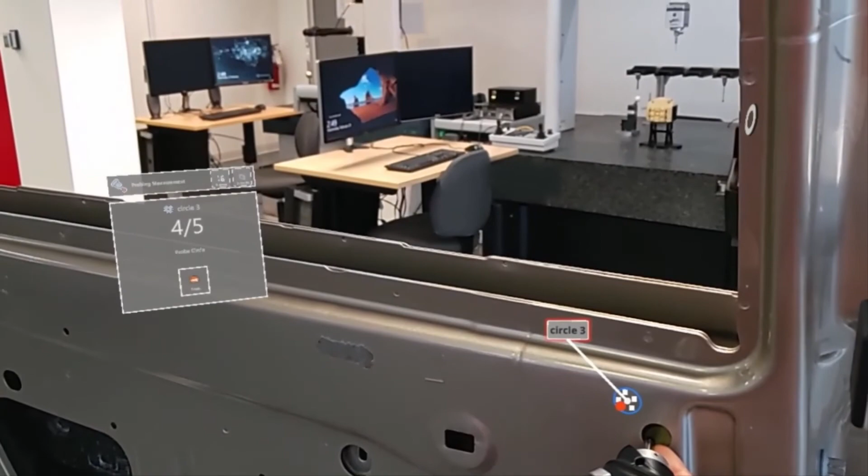At any time, we can take a step back and look for the next feature to measure, which is clearly indicated at the end of the arrow and with a blue contour. The HoloLens continually tracks our movement in the room, so even though we are kneeling on the floor, it always knows our position relative to the piece and guides us correctly through the measurement process.

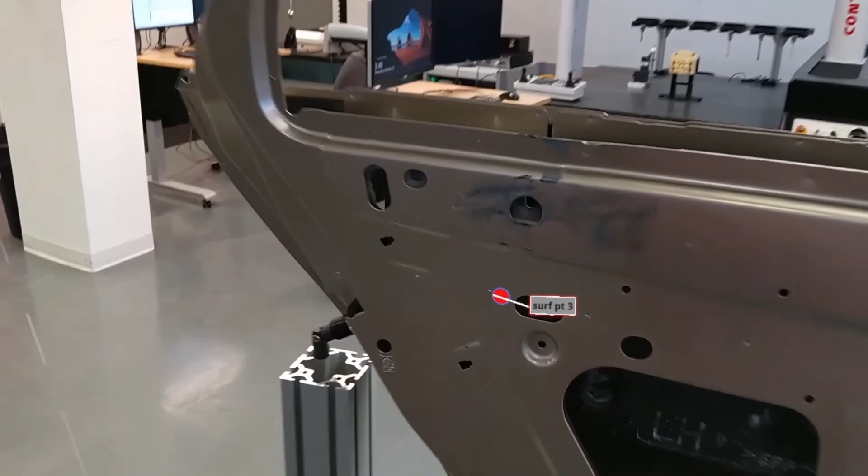Sometimes, comparison points can be hard to probe, as you need to be within a certain radial tolerance. PolyWorks AR makes the task a lot easier. Simply place the orange probe within the target area, and you'll be sure to measure it at the right place.

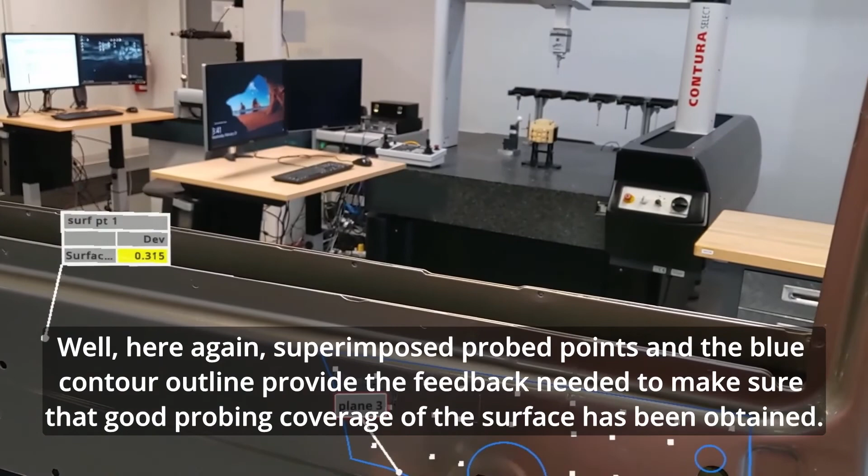Now, what about making sure that you have good probing coverage for certain objects, like a plane or a surface, for example? Well, here again, superimposed probed points and the blue contour outline provide the feedback needed to make sure that good probing coverage of the surface has been obtained. And if some of the points are mistakenly taken, we can right away eliminate them and see the result on the hologram.

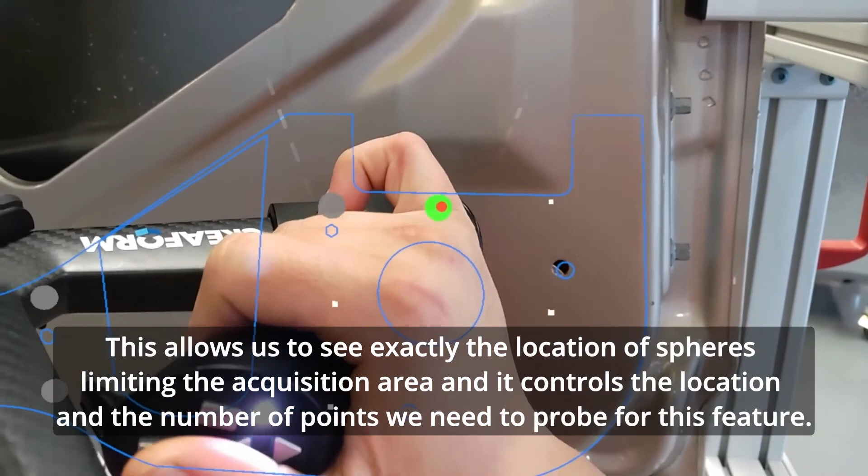Here we leverage the enhanced guidance of PolyWorks AR to help obtain repeatable measurements with the help of guided point acquisition. This allows us to see exactly the location of spheres, limiting the acquisition area, and it controls the location and the number of points we need to probe for this feature. We know when the probe is within the acquisition radius as the point turns green, and intuitively, we understand which of the points are left to probe, as the already probed ones disappear once they have been measured.

At the end of the inspection, annotations are displayed to allow me to review results instantaneously and overlaid at the right location on the part. We can freely walk around the part and close in to look at the annotations. With PolyWorks AR, we get ergonomic operator guidance and enhanced live visual feedback for all the probing applications.

There we have it. Holograms are great. They move with the operator's position, provide clear guidance and feedback, and are always perfectly placed. At one point, you forget their novelty and they become useful tools that are always within reach and reactive to the situation. Not having to look at the screen is a major benefit, but not having to walk back to the computer screen is another key advantage of using mixed reality.

With gestures, you can launch actions on the spot without having to go back to the computer. This is especially useful when working on large pieces, which are often measured with laser trackers. Also, since the measurements are mainly acquired with reflectors, which don't have buttons, access to virtual buttons is a real game changer. Now, we'll head back to the video to see the advantages of using PolyWorks AR with laser trackers. A tracker is being used that would usually require multiple trips back and forth to the computer.

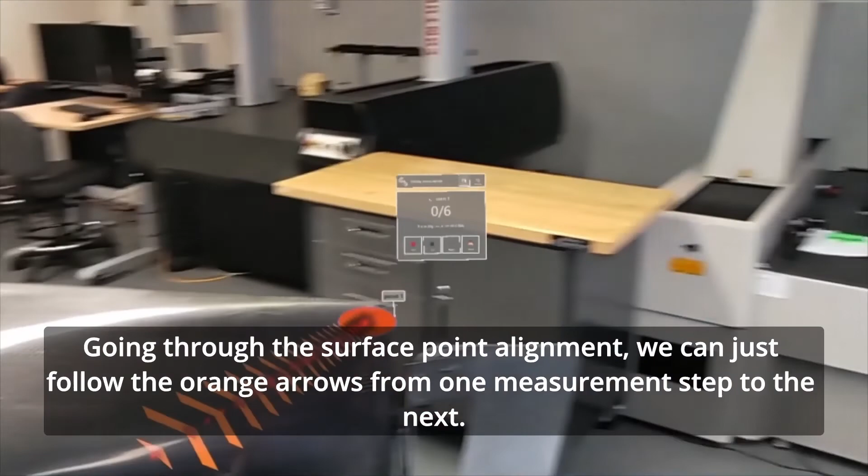So let us see this in action. We will start by scanning a QR code to retrieve the hologram position and begin a new piece inspection directly from the headset. Going through the surface point alignment, we can just follow the orange arrows from one measurement step to the next. Let's fast forward the surface point alignment. Knowing the next point to measure really makes the tracker measurement effortless on such a large part.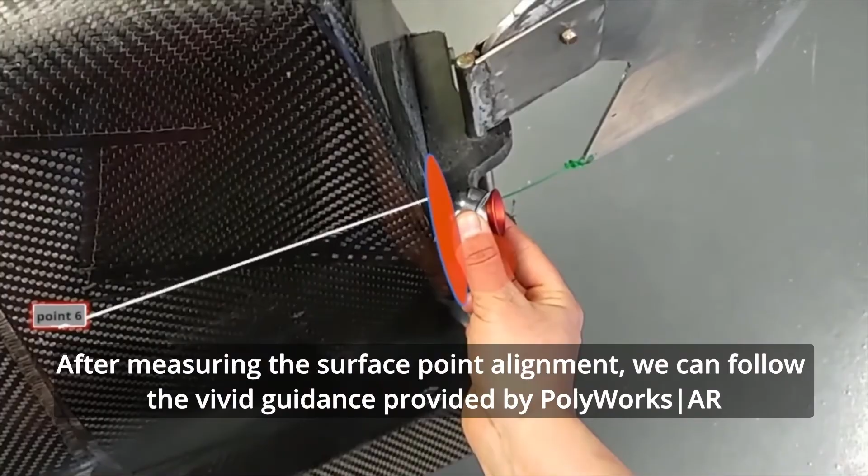After measuring the surface point alignment, we can follow the vivid guidance provided by PolyWorks AR to run through the entire inspection and focus our attention on what is right in front of us. We are measuring circle 1 with a fixed number of points, 8 to be exact. As the points are being acquired, they immediately appear in the field of view. The next measurement is the backplane. Its contours are highlighted with a blue line and its points are displayed as they are taken. The only thing missing is to compensate the point, as indicated in the visual display.

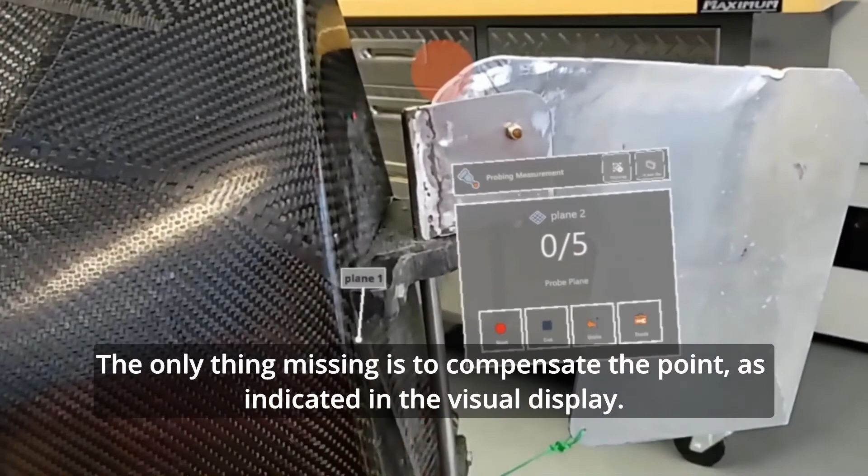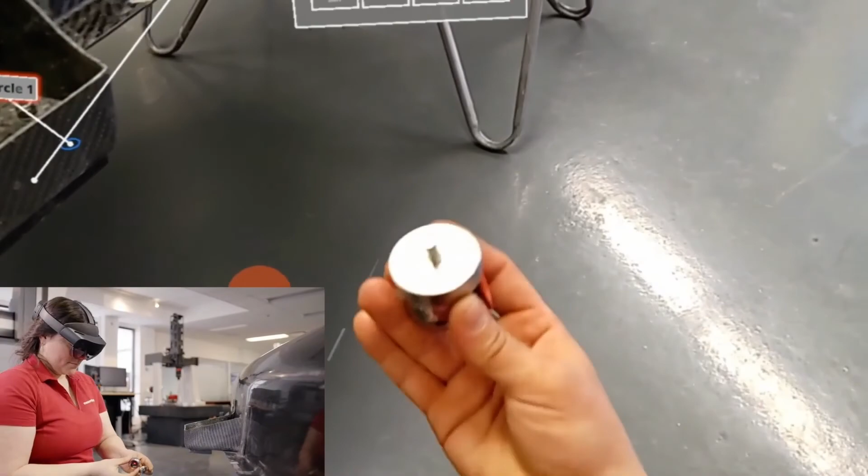Unfortunately, we have lost the laser beam since the laser tracker head did not follow us to the position. No worry, we can use the Come to Me feature to quickly catch the beam and continue the inspection. Now we will need a pin nest, like the one here, to measure this circle. We can change tools directly from PolyWorks AR's interface without having to run back to the computer. We are not sure whether those first 3 points were in contact with the surface. Therefore, they will not have been acquired correctly. We will just delete them and restart measuring the hole.

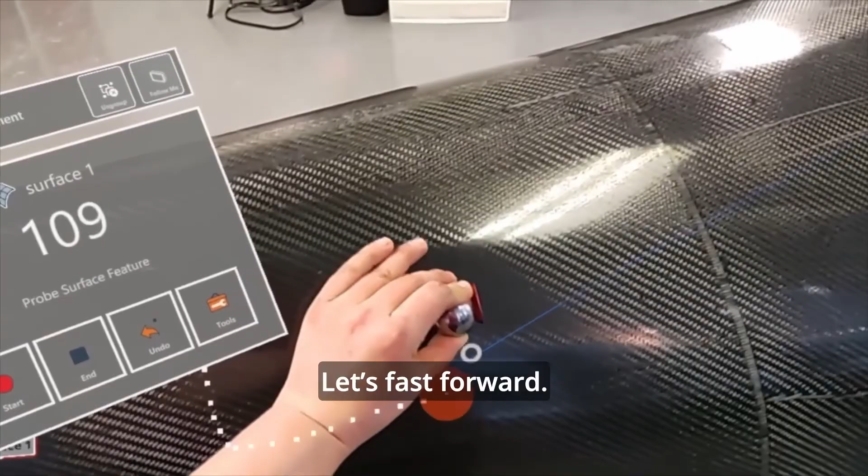The final feature to measure is the biggest one. We need to probe the complete boat surface, starting at the front and going all the way to the back, whilst displaying all the points being acquired. Let's fast forward. PolyWorks AR allows us to control the complete tracker measurement process without having to go back to the computer for point acquisition, tool change, and other functionalities. Now, all of our attention is on the immediate environment. That is the real game changer.

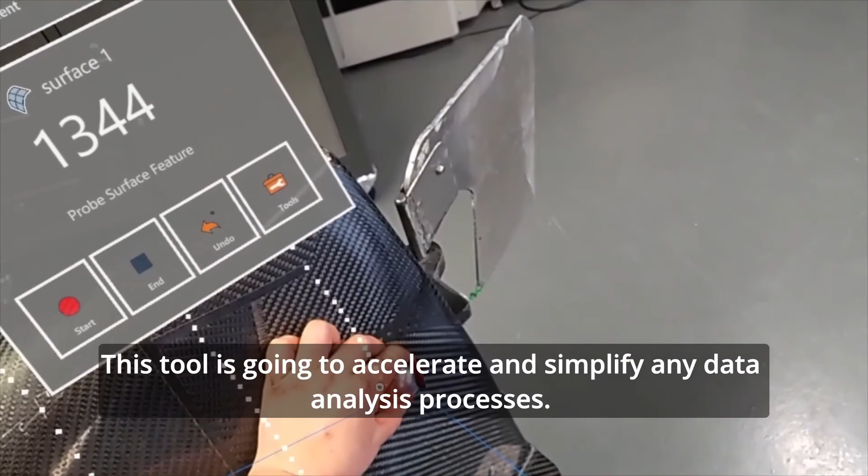This tool is going to accelerate and simplify any data analysis processes. We can now review results immediately after taking measurements while looking at the part. So we can now spend less time tied to the computer and more time building boats. We can now definitely see how using a mixed reality device can be useful when inspecting large parts away from the computer. And like we saw in the video, having the tools and the results you need at your fingertips can easily turn a 2-person tracker job into a 1-person job.

Now that we have seen all the benefits, this seems too good to be true. There is no need to prepare anything special, as all PolyWorks inspection projects are already compatible with PolyWorks AR. Rather, it is PolyWorks AR that will adapt to the content of the project. Really, the only requirements when using this tool are to install the app, master the hand gestures, and learn how to position the holograms on the part. The process is, however, not complete. You will see in the next video how to install the app and then how to locate the holograms on the physical part. Finally, we will see how some PolyWorks Inspector parameters impact the user experience when using mixed reality.

To install the app on the HoloLens, simply browse to the download page on the Technical Support Zone. Put on the HoloLens and virtually click on the QR code, which will open the download page of PolyWorks AR on the Microsoft Store. Afterward, we have to activate the plugin from PolyWorks Workspace Manager options. With a Wi-Fi connection between the HoloLens and computer, we can connect to the project. As soon as the project connection is completed, we begin the first manual alignment where we can grab the hologram and move it into the room.

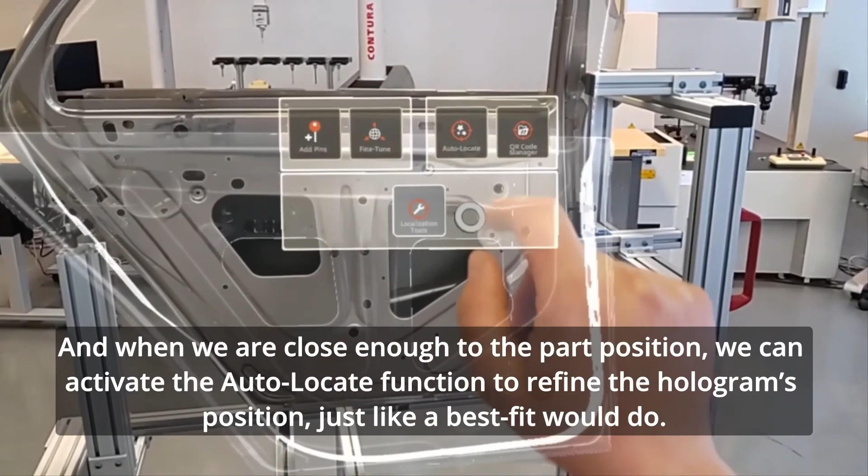The menu follows the operator when you manipulate the part. It then disappears and then reappears right away. We can adjust the hologram using hand gestures. And when we are close enough to the part position, we can activate the auto-locate function to refine the hologram's position, just like a best fit would do.

To adjust the hologram's alignment even further, we are going to start the fine-tune alignment. When entering this function, you see a gizmo that allows translating and rotating the holograms along the three main axes. It is possible to change the gizmo's position and angle to better suit your needs, as well as define the sensitivity of your sliders. We can orient the gizmo with its axes parallel or normal to the part. This helps us when moving the part around.

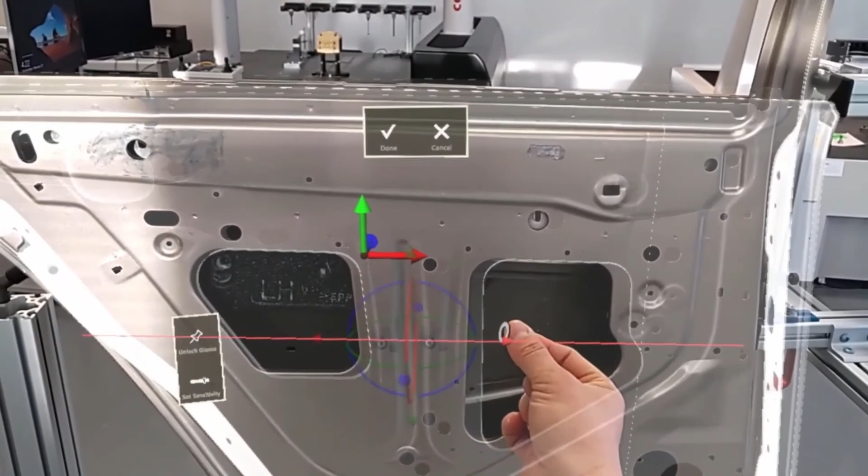When we are satisfied with the hologram's position, we can place a QR code next to the part and save this position for further use. This QR code must remain fixed to the part or fixture gauge. As we have seen in the first two videos, this can be quite useful if we are using a fixture for multi-piece inspection.

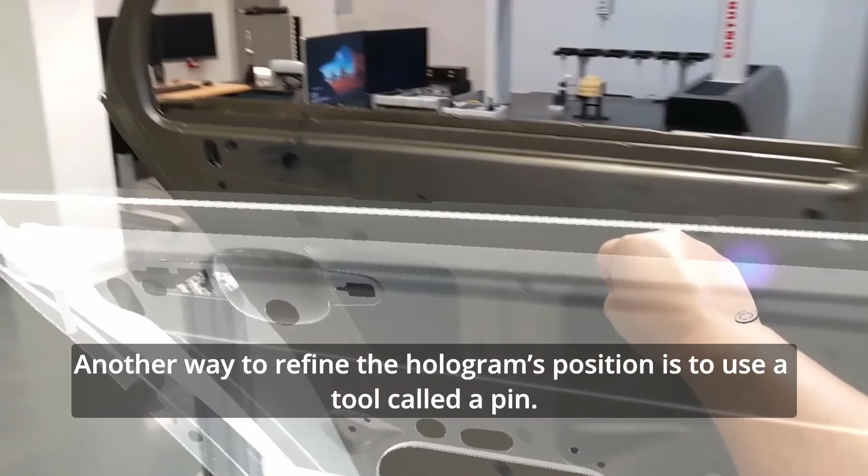Another way to refine the hologram's position is to use a tool called a pin. We are using manual gestures to bring the holograms into position. Once a portion of the hologram is in position, we can pin it to stop it from moving. Adding a second pin helps us to finalize the hologram's position.

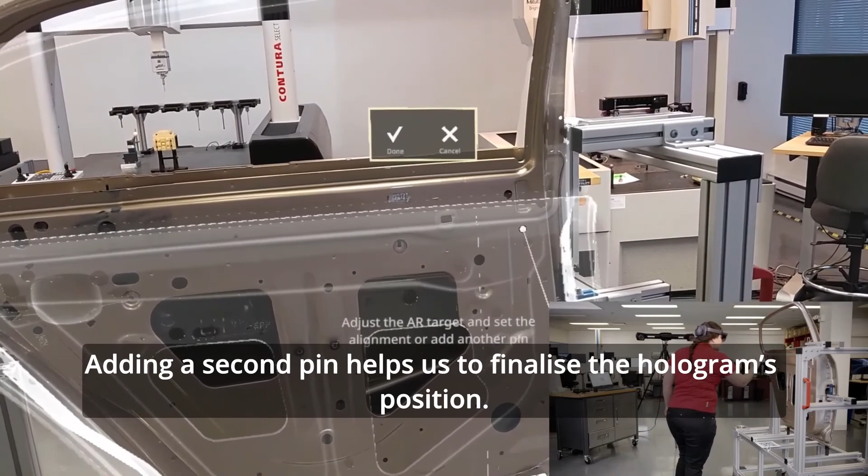Notice the gap in between the scan and the hologram. This is caused by the recording process, but at the end, the hologram is properly aligned to the physical piece. When we are satisfied with this hologram position, the QR code can be updated. The HoloLens setup has now been completed. It is now time to start preparing the inspector project for the shop floor team.

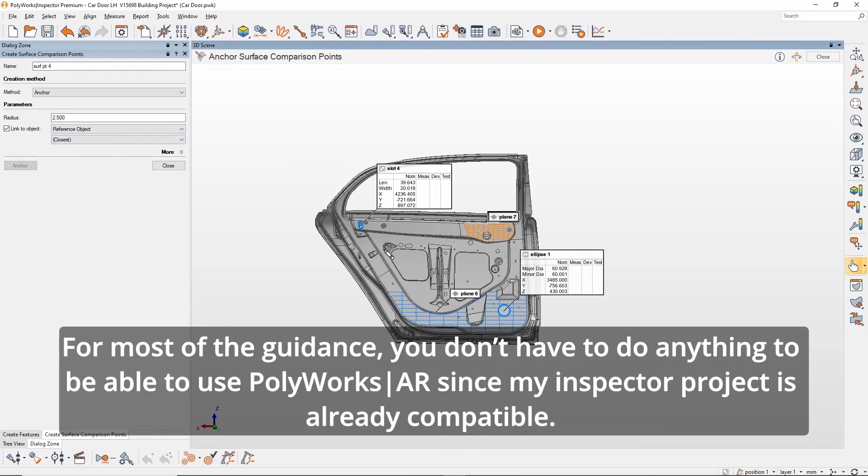First, features and controls will be defined just like you would do in a standard PolyWorks project. For most of the guidance, you don't have to do anything to be able to use PolyWorks AR, since my inspector project is already compatible. The orange arrows, blue contours of geometries, and the measurement sequence are all handled by the application.

Since we would like to show you all the possible options, let's go a bit deeper into properties that will affect what you see in your HoloLens. For example, adding the property for guided points and defining the guiding sphere, radius, and position. And even add guiding messages.

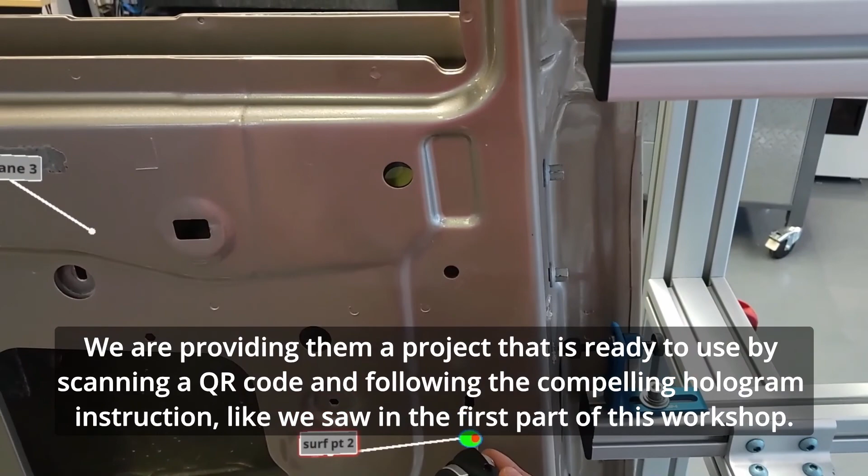The only missing portion to complete the inspector project is my metrology device. Let's align this measurement device using a surface point alignment and leverage once again the powerful hologram guidance to acquire data at the right location. This completes the project, which is now ready for the shop floor team. We are providing them a project that is ready to use by scanning a QR code and following the compelling hologram instruction, like we saw in the first part of this workshop.

We have just seen not only the capabilities of PolyWorks AR, but also how to use it, from the installation to positioning the holograms. This is a brand new experience for operators inspecting parts on the shop floor, offering them a tailor-made solution. Today, we saw how holograms can guide operators to the correct object while providing real-time feedback during the inspection, how laser tracker inspection can benefit from mixed reality, and finally, it is easy to implement. It is all there in PolyWorks 2022. Just get a HoloLens 2 device and mixed reality could become your reality for tomorrow's inspections.

Now, on my side, I simply hope that this workshop has opened your eyes to what mixed reality can bring to metrology. As you saw, probing can be much more efficient by having unmatched guidance and easy access to tools directly next to the part, without having to look at or even touch the computer. Yes, this might look futuristic, but the future is now, and our solution is ready. If you have a chance to try it, you will see for yourselves.